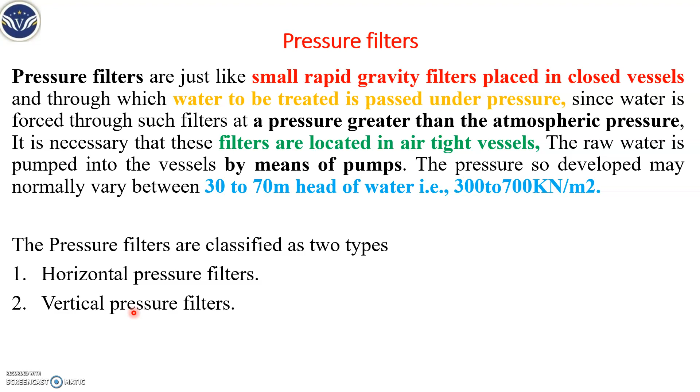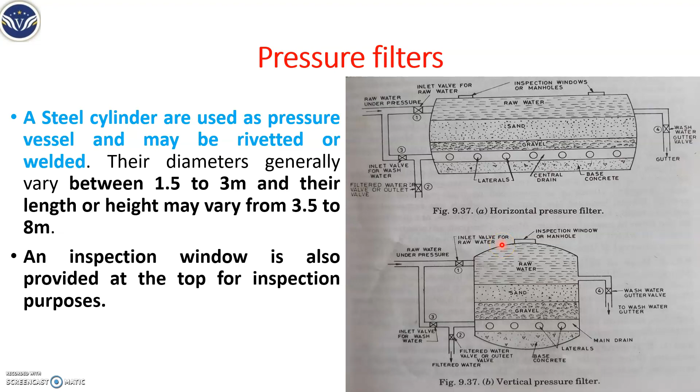Next, the pressure filter is made up of a steel cylinder. You can see here the horizontal and vertical pressure filter. Its diameter varies from 1.5 to 3 meters. The length or height tends to vary from 3.5 to 8 meters. It is riveted or welded. An inspection chamber, or inspection window, is provided to inspect the working of the pressure filter.

So now the working of the pressure filter. As I mentioned earlier, it works as an ordinary rapid sand gravity filter, and here you don't require any sedimentation, flocculation or coagulation chamber. When you want to treat water, you open valve number 1 and valve number 2, and keep all the rest of the valves closed, same as we have seen in the rapid sand gravity filter.

We add alum as a coagulant because there is no previous treatment given, like in a sedimentation tank. This line should be connected to the influent line of the filter. Here it gets properly mixed and flocs are formed outside the vessel itself.

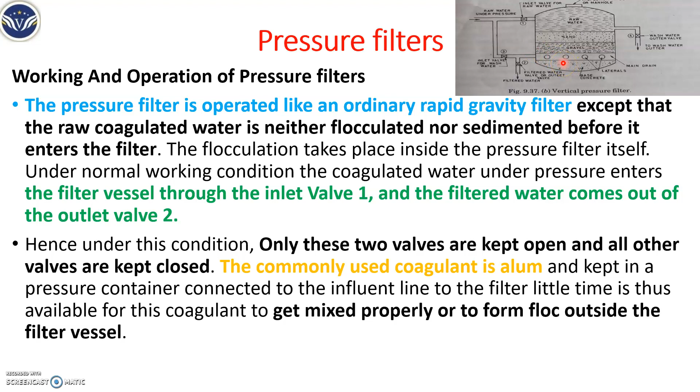Next, the cleaning process, which is the same as in the rapid sand filter. We close valve number 1 and valve number 2, and keep valve number 4 and valve number 3 open. Valve number 3 is the wash water valve, and valve number 4 is the wash water gutter valve. Water is passed under pressure and backwashing is done.

This continues until it has been cleaned properly and you have gotten a satisfactory result. The filter head loss should not exceed a certain value, so until you obtain that value, you do backwashing. In the pressure filter, backwashing is done more frequently compared to the rapid sand filter, because it clogs very frequently.

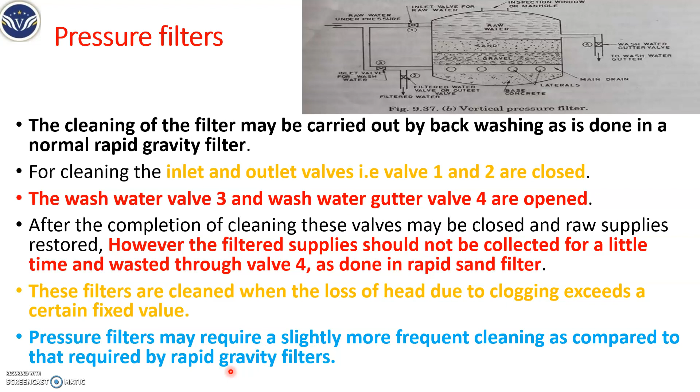Next, these are some of the advantages and disadvantages of the pressure filter. First, the advantages: it is compact, it is automated, it requires less space. High rate of filtration, no sedimentation or coagulation tanks are required, and it's flexible. When the demand is more, you can pump more water under high pressure, so you can achieve a higher rate of filtration.

It is best suitable for co-operative housing societies, individuals, industrial plants, swimming pools, etc., but it is not suitable for large treatment plants. Disadvantages: the major disadvantage is that because the capacity is small, you can't get more treated water, even though there is a high rate of filtration.

Here you can't efficiently remove bacteria and turbidity, because the coarse grains are more. Due to that, you can't remove the bacteria and turbidity. And it is very costly: if you want to use it for a large municipal water treatment, this process becomes very costly.

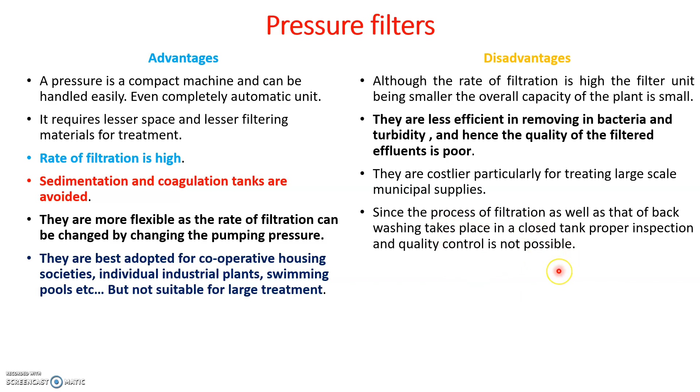So in this process, again you can see some of the advantages and disadvantages over here, same as the previous one. Installation requires less area. You can obtain highly treated water. No sedimentation tank is required. Based on the pumping, you can change the rate of filtration.

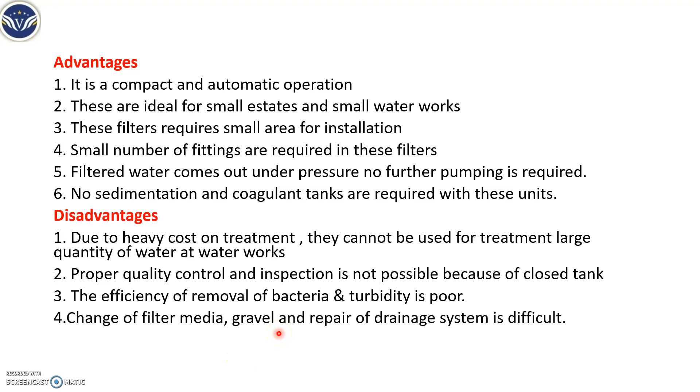It's very much costly. There is no proper inspection control of the water, and the bacteria and turbidity removal is very poor. And repairing of this filter media is very much difficult. So these are some of the disadvantages.

Next we will see some comparison between slow sand filter and rapid sand filter, which has been discussed earlier. So first one, pre-treatment requirement. Here the effluent requires a sedimentation tank. Sedimentation tank in rapid sand filter is a must. Generally in slow sand filter you don't require that one.

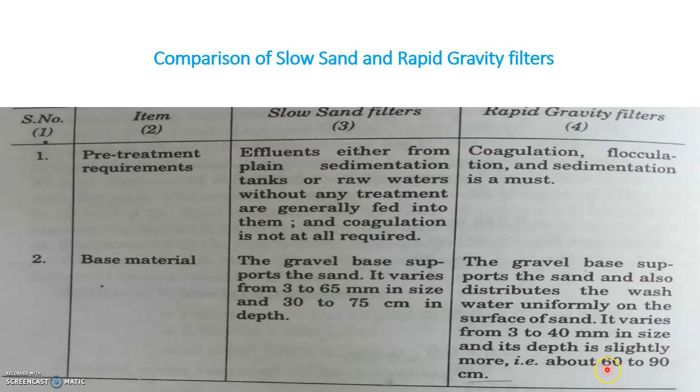And you can see the support base. The support gravel base varies from 3 to 65 mm in size, and in depth it varies from 30 to 75 centimeters. Here there is a little bit of difference. It is from 3 to 40 mm in size, and the depth is also slightly more. It is 60 to 90 centimeters.

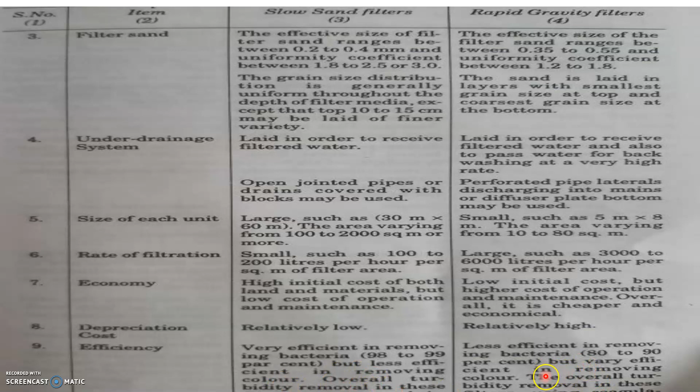Flexibility you can't achieve in slow sand filter, but you can achieve it in rapid sand filter and pressure filter. According to your requirement you can change the filtration rate. Suitability: this is suitable only for small villages. This one is adopted mostly universally, for small cities, major cities and towns.

Post treatment: here we only add some disinfectants, but here we need to add disinfectant and give some miscellaneous treatment also, because there is high turbidity and bacterial presence. Construction: it is very simple in construction, this one is complicated. No skill required, but here it is essential.

Approximate head loss here lies between 0.8 to 1.2 meters. Here approximate head loss lies between 0.3 meters to 2.5 to 3.5 meters. Method of cleaning: here it is scraping, a laborious method. Here we provide backwashing.

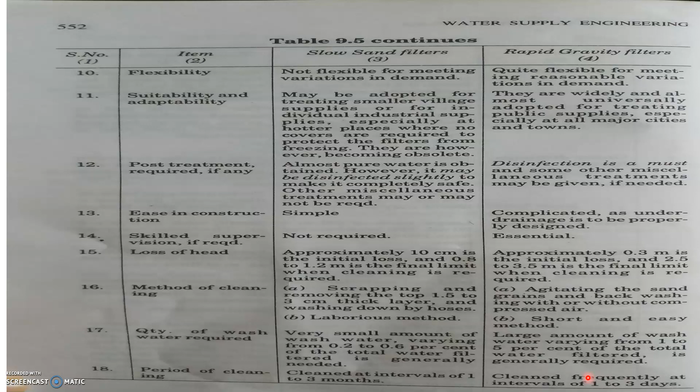And quantity of water for backwashing here is very much less. Here we require more water for backwashing. And the cleaning interval is from 1 month to 3 months. Here the cleaning is more frequent, as well as in pressure filter. So these are some of the comparisons between slow sand filter and rapid sand filter.